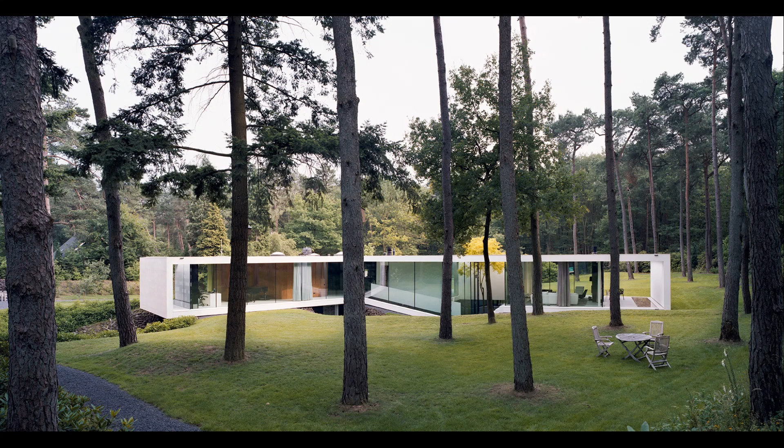So we came up with the idea to call the company Powerhouse Fortune Company. But that was a bit ridiculous because we were broke, so we left out the fortune and called it Powerhouse Company. Now, Powerhouse means a very ambitious and hard-working team, to be a powerhouse. And company stands for the idea to collaborate, to work together, not only with architects in the office, but also with your clients and different partners. And that's how we set off. And we were very lucky that we got a fantastic first commission for a villa, and for me it was a fantastic time.

I was able to use all my knowledge from the Fachhochschule in crafting and drafting this first project, and we won a lot of prizes with it. And it was for me a fantastic way to return to architecture as an active deed of doing after, let's say, 4 years of mainly thinking and writing and doing very large schemes.

So in the beginning of the office in 2005, the economic momentum was quite good, and after our first villa, we got another villa as a client. So we were going quite well until, of course, in 2008, the entire economy collapsed. And what was for us quite shocking as architects was that we discovered that after the bankers, the architects were also fired. So the two biggest groups of people that were being fired were the bankers and the architects.

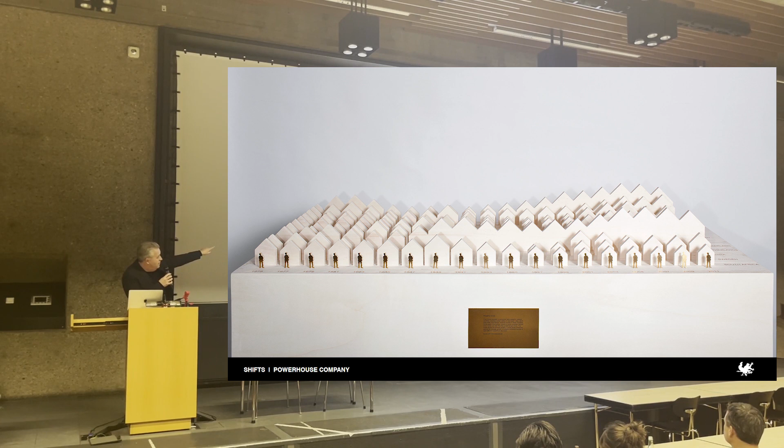Basically, that is the rising average wage in Europe, and you can see that it's not really rising, it's extremely stable. And in the back you see the housing prices going up and down. And you can see in some countries that the housing prices are going up a lot faster than the wages. And this simply means that in some cases, as was also in the last few years, houses were making more money than the people living in it. So people could go to work, but the houses stayed at home, and they made more money in a year than you did as a worker.

So these mechanisms were for me extremely interesting to uncover, this kind of relationship between finance and architecture, and also you could say the almost paradoxical relationship. And at the same time in the office we really try to keep on working and try to basically build as much as we can.

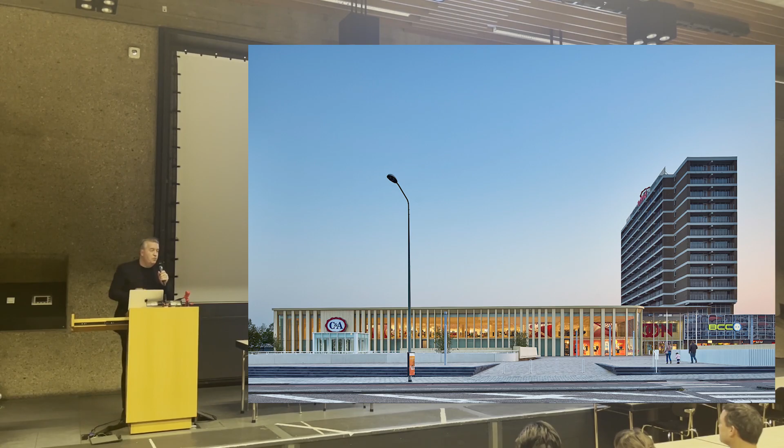So one of the projects we did at that period was, for instance, this extension of a shopping mall from the 60s, which was a job that we were very eager to do, because I was also eager to explore commercial architecture. But as we did this design, it was for me very fascinating that we were only allowed to design the facade, and we were not even allowed to communicate with the contractor about the way it was being built. So it was actually, you could say, an extremely uncoupled experience as an architect. It was definitely not as integrated as the villas we were doing.

Talking about villas, in that same period we got another commission for a villa in Munich, and that was built over the course of 3 years. And this villa was, you could say, a total Gesamtkunstwerk, where we were able to detail almost everything in the building. On the front facade, the building is entirely made of marble, as you can see. But these louvers, as you can see, can also open and close automatically.

The doors were, of course, entirely custom made. Here you can see all the sliding panels and all the windows, meticulously detailed. And of course here you can see that our love for detailing and engineering is extremely present.

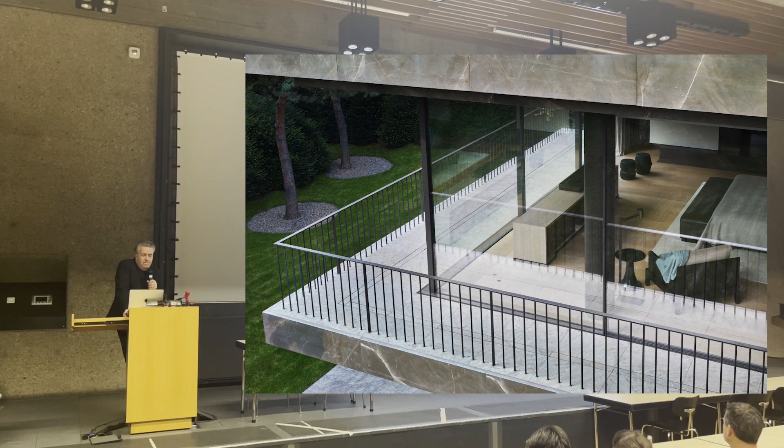But these kind of projects are the projects where as an architect you can fully manifest all your, let's say, design desires without being interfered by the kind of cruel logic of the marketplace. So, as beautiful and as nice as it is to build these buildings, of course, for me it's also very much kind of a niche within architecture that I very much enjoy doing and building.

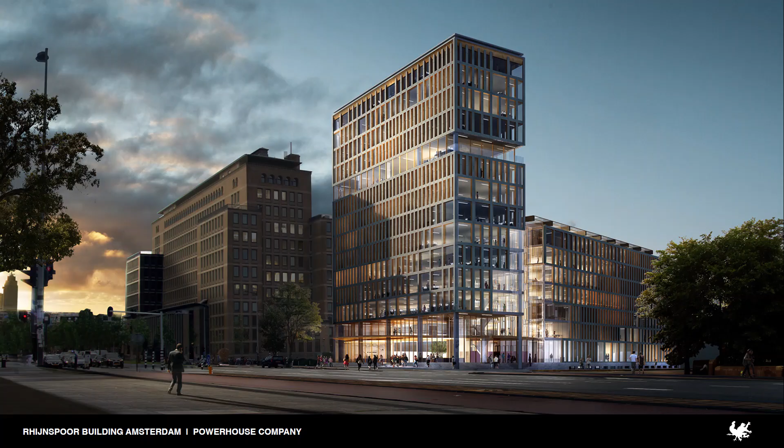But at the same time, I also believe that architects are generalists and should generally be able to build any type of building. So even though it was for us, let's say, relatively easy to keep on working only in the villa department, we were always really pushing to do other types of buildings. Now one of the next buildings we did, which was for us a very big step, is when we won the competition for the Fachhochschule in Amsterdam.

Actually, it was the school where I went to school myself. It was a competition that we won to design the new building. And I was extremely excited because I thought, well, this is the first public commission. And I thought, well, now that we win it, we will probably immediately have a meeting with the director of the school, with the dean, to talk about his ideas about education, to see how we can use architecture to improve technical education. But the irony of that building was that, I can talk shortly about it.

The plot is right here, it's right in front of these two buildings. The building on the left is a building that everybody loves in Amsterdam, and the building on the right is a building that everybody hates in Amsterdam. And the funny thing is that the building on the right is an extension by the architect that used to work for the architect of the building on the left. So there's, people say, a little Oedipus thing going on there.

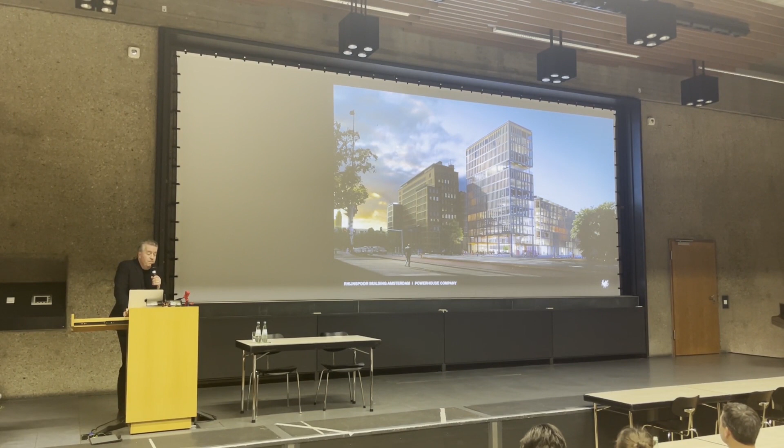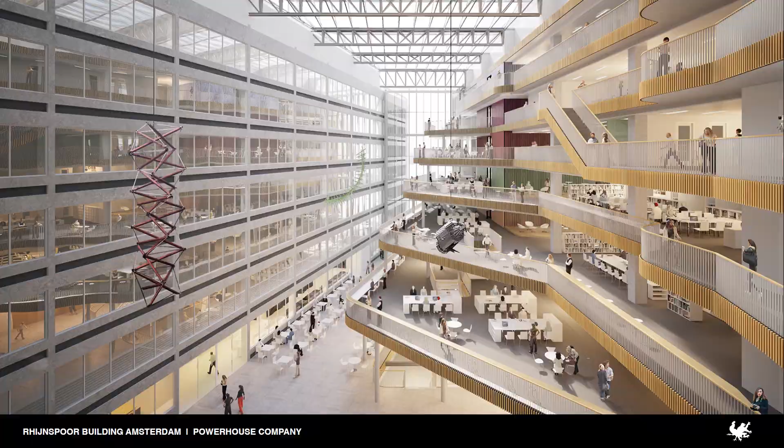And what we basically did is that we built this building in front of it, and by building in front of it, we were also able to create a new atrium inside, which was able to use the facade of the building that everybody hates as a new interior facade. But for me, the interesting thing about this project is not so much about the architecture, but what I want to speak about is the fact that it took almost 3 years for us to speak to the director of the school.

Because the first meetings we had were with the facility manager and with the financial manager of the school. And all the meetings we had in all the technical phases were only about the real estate logic of the school. So it was all about square meters per student, the size of the classrooms, the amount of money being spent on these students. And for me, it really led to a larger research where I started to see what is this public client actually about? Do we still have public clients in the Netherlands?

And it led to this kind of moment where I really started to think about this kind of reality that is surrounding us, which is, you could say, the hardcore neoliberal reality, which is also the case in Europe in general, where culture and architecture is more and more swallowed by the commercial domain and not so much anymore part of the welfare state. For me it was clear that the role of the architect is diminishing in this kind of neoliberal world, this increasingly capitalist world we're living in, whether we like it or not.

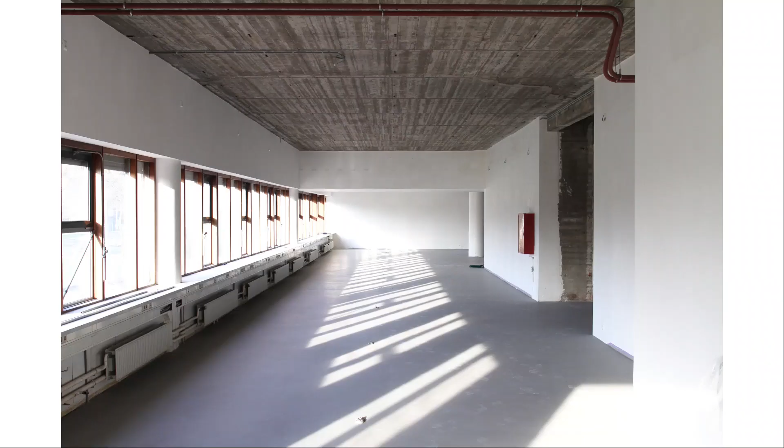So what I tried to do is find a way to buy that building and then transform it into apartments. What I managed to do is ask the government whether I could buy it from them, but I would only pay once I changed the zoning law. And they gave me 2 years to do that, and in those 2 years I was able to change the zoning law and sell the apartments. And with that money I was able to renovate the building and of course change the plan entirely into a living and housing plan.

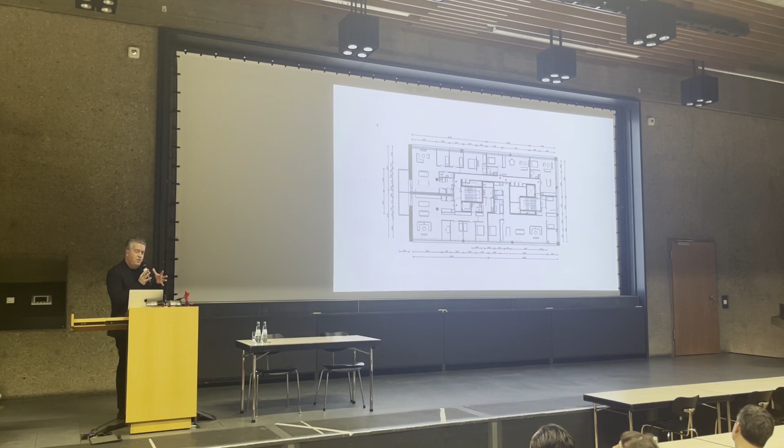And what we did, for instance, was to mix smaller apartments with larger apartments. Interestingly, the real estate broker said you shouldn't really mix smaller and bigger apartments, because then you have people with less money mixed with people with more money, and it will create problems. But I said, I think it's actually nice to mix them. I think it makes sense. And he also said the bigger apartments, you probably won't sell them. The funny thing was the bigger apartments we sold immediately, the smaller ones as well, actually. And we managed to sell all the apartments and transform this old office building into a new residential building.

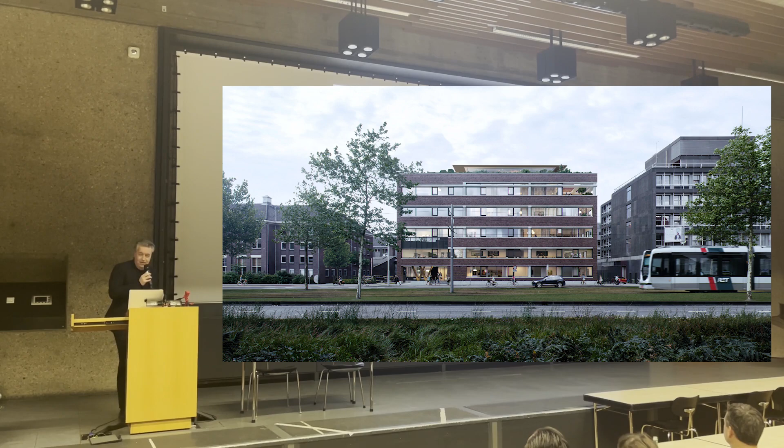And then on top of it, as you can see, I built a house for myself, because that was of course also one of the secret agendas, to build a fantastic penthouse on top of the roof. So that's my house on top of the roof. And this was my first experience with project development, which I really liked a lot, because all of a sudden I was doing a commercial project, but I was also in charge of it. So I was able to really think about the qualities of mixing smaller and larger apartments. I was able to think about where I want to invest, what qualities I want to create.

At the same time, I was also director of the Berlage in Delft, which is a postgraduate school, and also a school I went to myself, so it was very nice to come back and be the director of the school. But since the Berlage is also an accredited institute, after 3 years it became clear to me that working in an academic environment is really quite frustrating, because it's extremely pre-programmed according to the accreditation committees. Well, I guess a lot of the professors here will probably acknowledge that. It's always quite a struggle to find your way with these quite hardcore accreditation committees.

So after 3 years, I was doubting whether to renew my term. And since I had just done this first development project, I thought, you know what? Maybe I shouldn't extend my term for another 3 years, but maybe I should just become a project developer and start a new company. That honestly felt a bit like making a large jump, because of course developers are generally seen as kind of born evil.

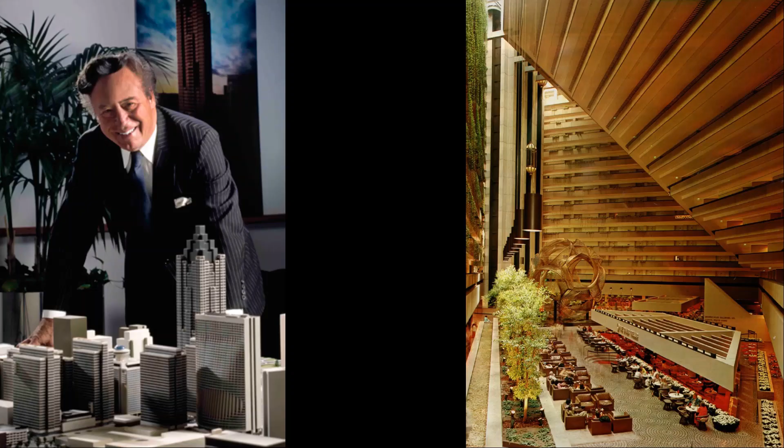Of course, there's few examples of architects that also develop. This is one of my favorites. If you don't know him, you should really look him up. His name is John Portman. He's from America. He was a developer from the 70s onwards, an architect turned developer, and he developed really huge hotels, fantastic shopping malls, and he was quite inventive.

For instance, the hotel on the right, which is the Hyatt Regency in San Francisco, had this massively huge atrium, which became extremely popular. At that time, all the developers thought he was doing something extremely stupid because he was building this huge atrium. And they said, what's the use of this huge atrium? But of course, as a space, it's fantastic, and it still is a fantastic space. It's a kind of ruthless building. And it became a wildly popular model for hotels in the 70s.

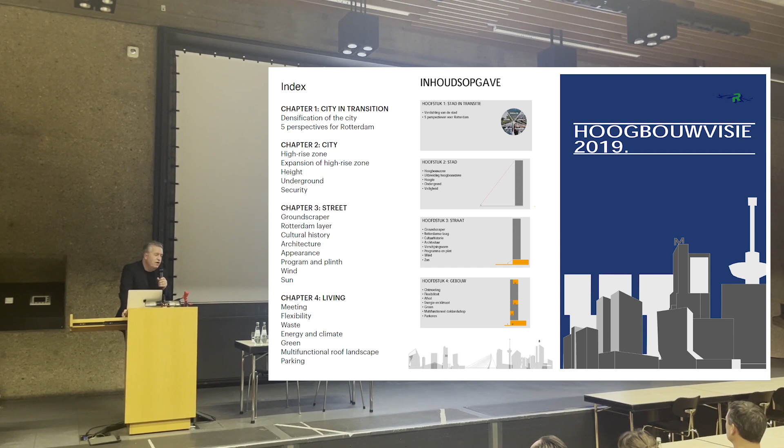So Rotterdam redefined itself as a modern city, and it's also redefined itself as a high-rise city. Now, Rotterdam was the first city in the Netherlands to create a kind of high-rise policy. And I think that's quite interesting to speak about, like how did they do that? And what is interesting is that Rotterdam really defined areas where densification by high-rise is allowed. And they defined all these areas where you can build towers.

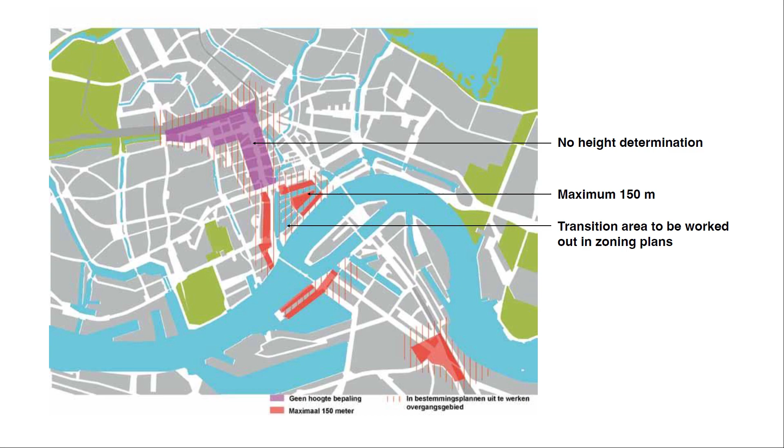These are basically along the main streets and main roads of Rotterdam, and also in the areas where in the 60s they built mainly shopping and offices and actually quite little housing. Interestingly, the city center of Rotterdam has quite a limited amount of housing because of the modernist planning—there were a lot of offices planned.

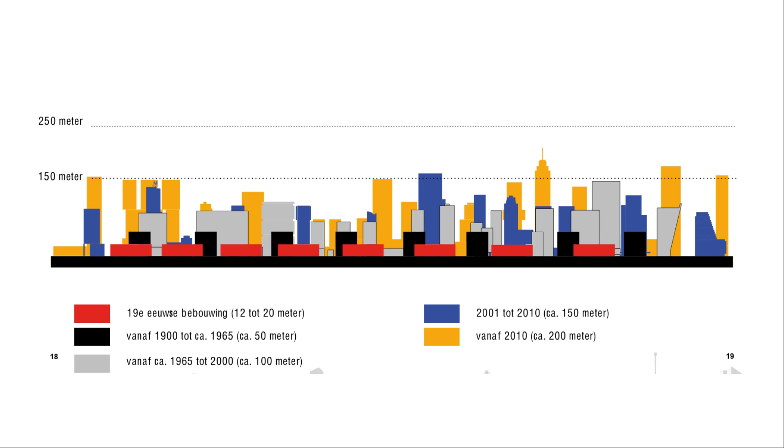This whole policy is updated quite regularly, and it describes all the different facets of the Rotterdam urban structure. So basically you have the 19th century housing, maximum 20 meters high, which is the red part. Then it has the up-to-50-meter-high part until the 60s, and then it goes up from there into the early 80s and 90s until the 2000s now. It's really trying to create this mixed skyline of all these different sorts of architectures in Rotterdam.

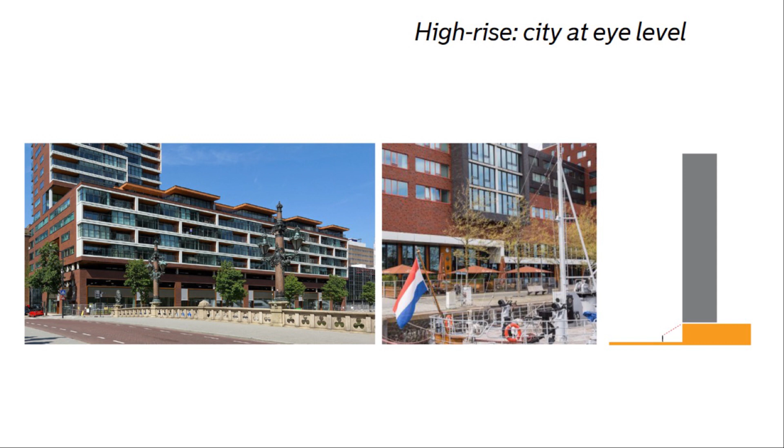But what it's now focusing on a lot is how the city looks at eye level. The policy now says that if you want to build a tower, you can only do that if you really create a livable city at eye level. That means all the technical spaces need to be underground, all the parking needs to be underground. On the ground level they want shopping activities or people living there so there's really a contact with the street. That's actually a very important rule.

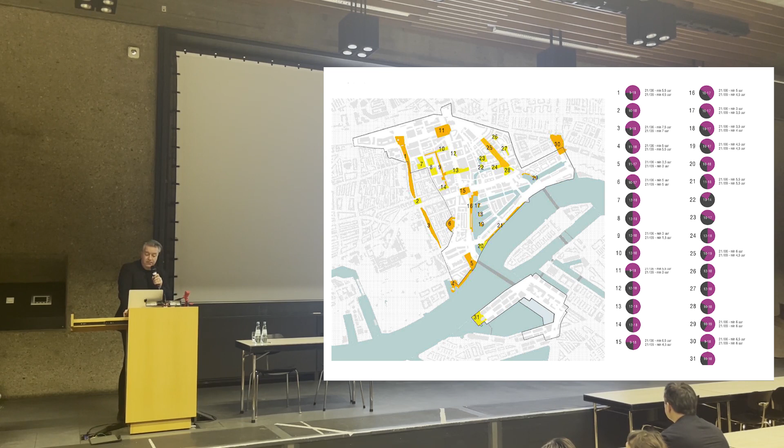Another thing they did is define public areas in the city where they want to keep a certain amount of sun and where you cannot add more shadow. It's a very interesting principle—they're called sunspots, and all these areas are the main public spaces. Whatever tower you design or add is not allowed to add more shadow than a certain amount, which you can see on the right.

Then, of course, there's the whole idea about wind as well. The way wind behaves around towers is also researched a lot in Rotterdam, and it's used to define an idea of setbacks—the towers always step back a certain amount to actually block the wind from creating huge wind tunnels.

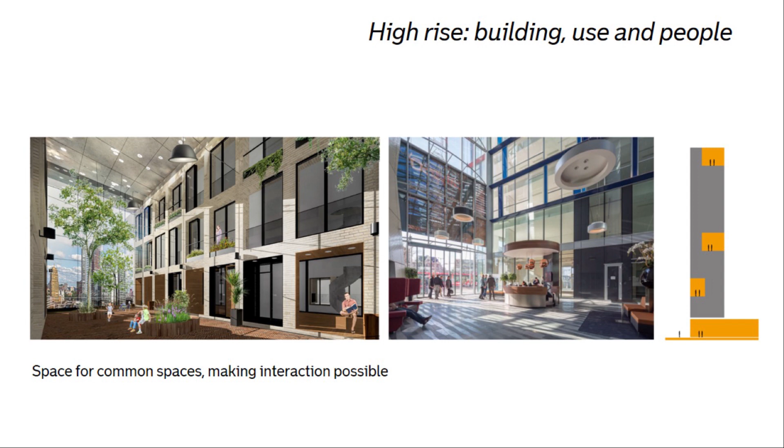And of course, what they're doing recently is adding this idea of social interaction in the towers—you're not allowed to go from the parking garage straight to your apartment. You always have to go through the lobby, and if the tower becomes really high, you have to add another lobby so people actually have space to meet and interact. The idea of anonymous living is countered with that.

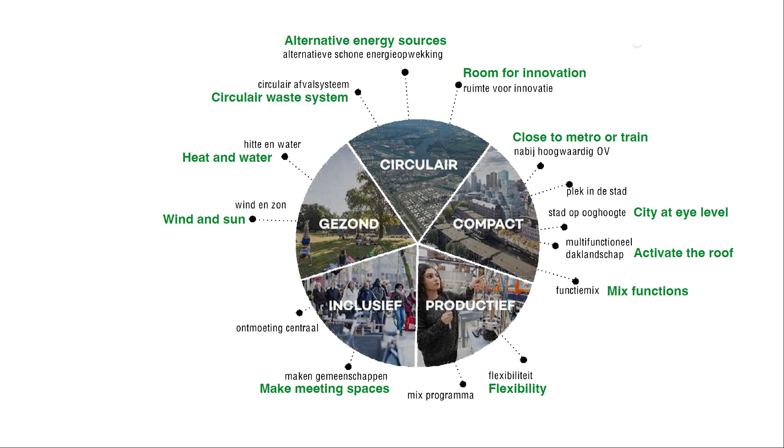So basically, the Rotterdam high-rise policy has really evolved a lot, and it became a really comprehensive idea on how to create sustainable towers. We're also looking at all the different qualities you should consider when designing a tower, whether it's alternative energy sources, proximity to public transport, inclusivity, or health. All these elements are now part of the high-rise policy.

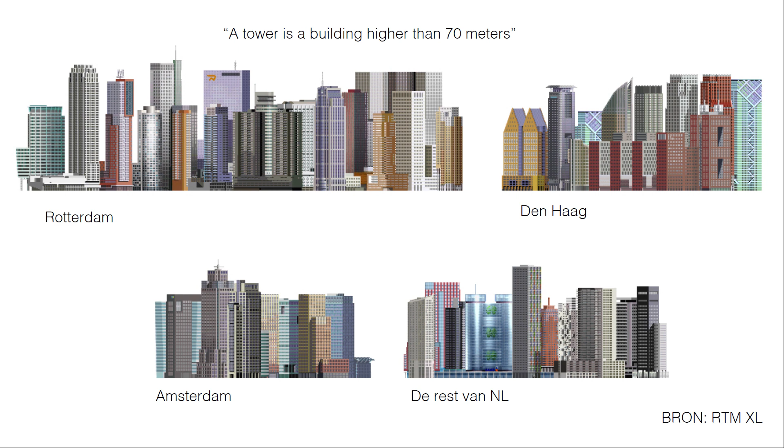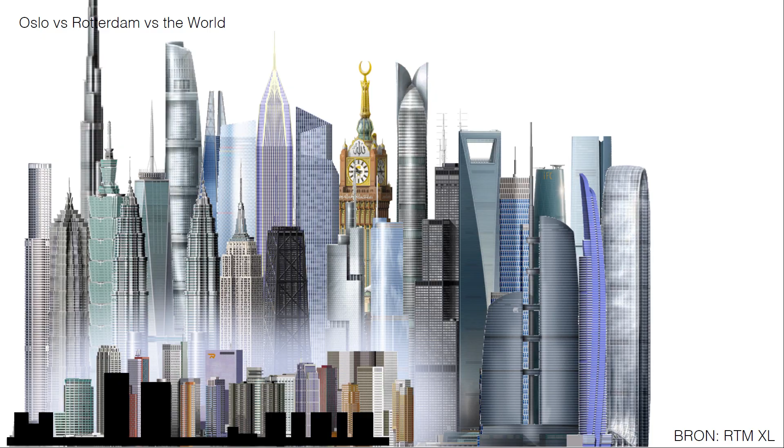Now, when we talk about high-rise, I want to show this quickly—these are the high-rises of Rotterdam, and in Holland we consider every building higher than 70 meters a high-rise. Now this is Rotterdam, and this is Rotterdam and Oslo—you can see that Rotterdam is not that high. And this is Rotterdam, Oslo, and the world, and you can see that Rotterdam is actually extremely low. So even though in Rotterdam we speak about high-rises, it's still extremely gentle, you could say.

It's actually right in the center of Rotterdam, and in that area we're allowed to build 150 meters high. But since the site was quite small and narrow, we designed this quite slender tower there, 22 by 22 meters.

Creating a very compact tower, and at the bottom making setbacks to create a very lively plinth. And then as a main quality, creating these fantastically large windows to really create amazing views over the city.

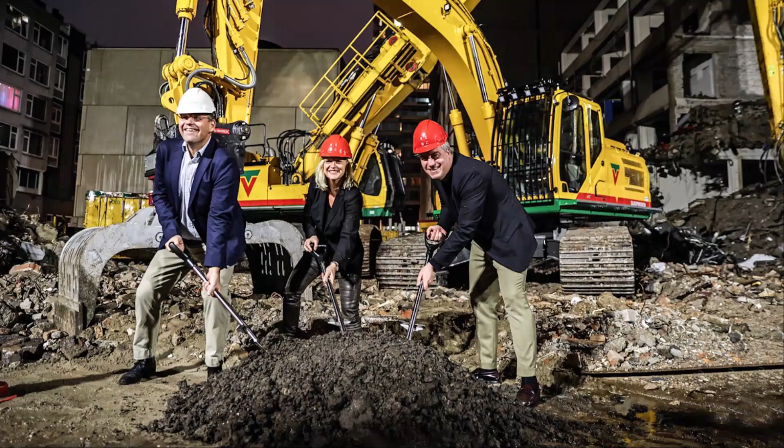Over the last 8 years we worked on getting all the permits for this, and actually 2 weeks ago we finally started construction of that project, as you can see. I'm super happy that we finally managed to start building this tower, which we designed and also developed.

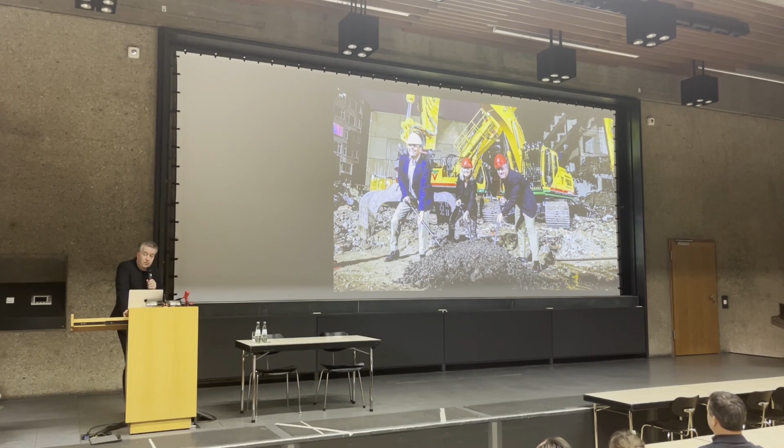It was actually our first introduction to high-rises and how to integrate them into the urban fabric. A few years later, in 2018, we started working on the Rijnhaven master plan and on the Koninklijke terrain. The Rijnhaven, just to give you an introduction, is actually this harbor.

It's the Rhine harbor. What you can see right in front of you is that the Rijnhaven was made in 1910, and when it was finished, it was actually the most modern harbor in the world. It was the first electrical harbor, and it had the largest warehouse in the world at that time. It was also the part of Rotterdam from which all the boats to America would leave, which meant that people like Thomas Mann, but also Albert Einstein, left from the Rijnhaven to America.

And there's still a hotel there called Hotel New York, a beautiful Art Deco hotel built in that time, which was the point of departure. So millions of people here from the Rijnhaven departed to America.

But what I think is interesting to realize is that when you look at the center of Rotterdam, you can see all these harbors here. These are all the historical harbors, so this is basically the origin of Rotterdam as a harbor city. When it was completed, the Rijnhaven was actually the largest harbor in a new harbor basin in Rotterdam.

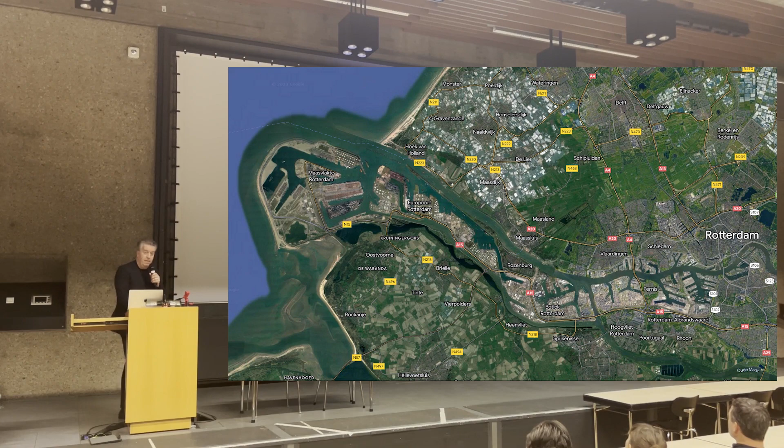And then when you zoom out, you actually see the latest harbor we added, which is the Maasvlakte, which in itself is bigger than the entire city center of Rotterdam. It just shows you the massive scale increase that the harbor of Rotterdam has gone through over the last 100 years, because the Rijnhaven is 110 years old.

So the Rijnhaven, of course, is pretty much useless today as a harbor. It has been for 30 years already, as is also the Maashaven right next door. These harbors are still in use, and of course, all the way in the back here is the Maasvlakte.

In the 90s already, the city of Rotterdam set out to redevelop this harbor by building this Erasmus Bridge, designed by Ben van Berkel, and it became a really famous icon of Rotterdam. Then in the last 25 years, all these high-rises were built on this piece of land. This was still very much a bad area, and when they built this little bridge here, this whole part was amazingly activated and now became an extremely nice area to live.

Ever since, the Rotterdam municipality has been thinking about a master plan for this entire Rijnhaven, and we were closely engaged with that because as a developer we were engaged with this plot of land called the Koninklijke factory, which is the last factory still active in the Rijnhaven area. It's actually a food production factory, and because that factory is still active, it is impossible to create a loop around the harbor, because this factory is still blocking the public use of this space.

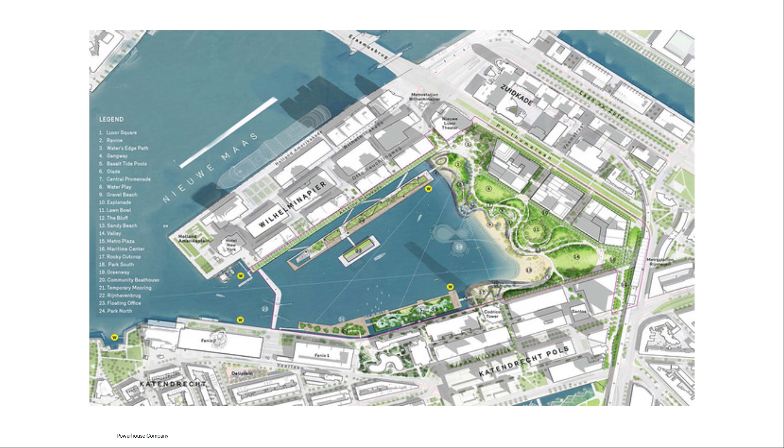So the master plan that we designed over the last few years, together with the municipality, is very much an integrated effort in learning all the lessons from the Wilhelmina Pier, which was done in the 90s, which is basically a checkerboard of very large towers that are all quite separate from each other and also really have their own identity.

Basically, they're all ego-driven towers by the architects, because there's Foster there, there's Koolhaas here, there's Alvaro Siza here, there's Mecanoo there, and MVRDV running one there. So basically this is one particular way, you could say very much a 90s way of planning that part.

The municipality said if we're going to redevelop this harbor, then we really need to make it a lot more nature-based, because at the moment it totally lacks green, it lacks parks, and it lacks space to stay outside and enjoy urban life.

So what the municipality decided was to basically fill this part of the Rijnhaven again with land. By filling this part with land, they were able to create a huge park and create spaces for more housing.

And on our side of the project, we were thinking about the redevelopment of the factory area right here. By redeveloping it into housing, offices and hotels, we were able to create this urban loop around the Rijnhaven.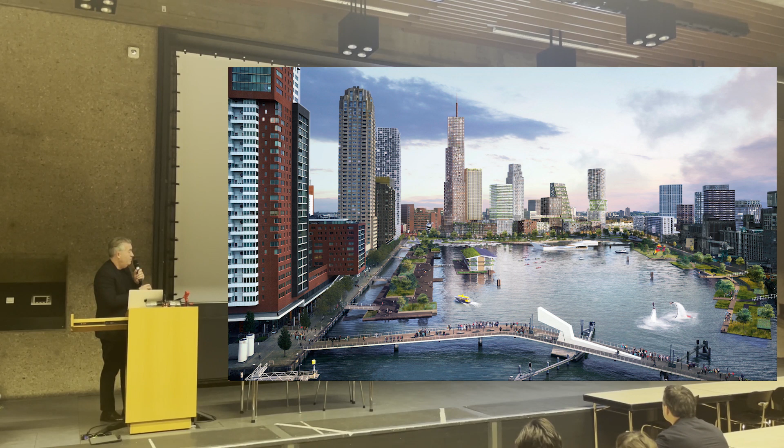So this is what the municipality and Powerhouse together designed. The idea is to create this park here with densification of office towers and housing towers. This is all housing, and then around it also floating parks, because the Rijnhaven is a tidal river.

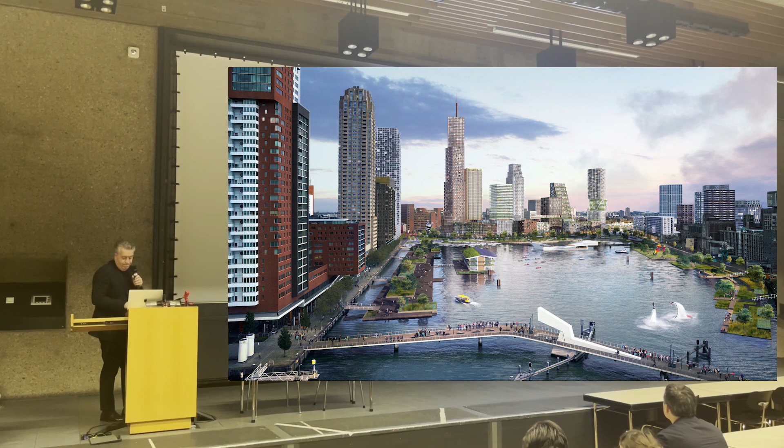It's going up and down 2 meters every day, and we create here these floating parks. And of course on this side we are very busy with the redevelopment of the Codrico factory. I'll speak more about the floating office later.

So we were able to also reuse parts of it. What you can see about the factory is that it was built in the 50s, right after the war, as a kind of cooperative

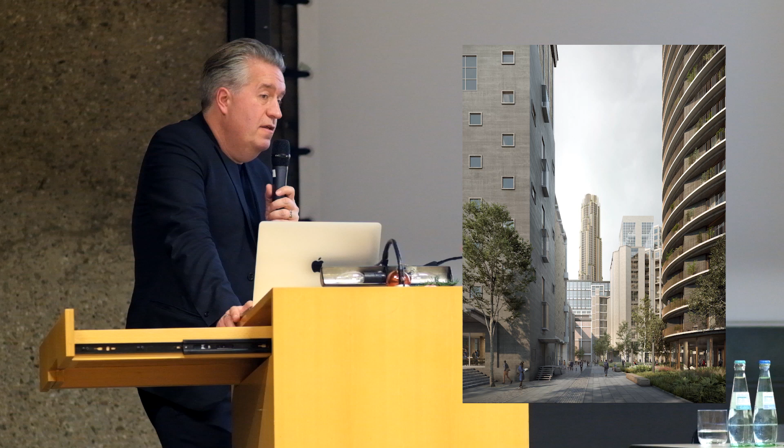And it's really a kind of search for the right way to introduce architecture into this project, because when you work with monuments, it's always a question: do you really want to confront it with a totally different language, or do you want to design, let's say, in harmony with the language of the monument? So these are the designs that we are making, and it's really turning, I think, into a very interesting unity of objects. And also I think it will be very interesting that finally this factory space, which is now a totally private area where you can never walk, will become a totally accessible area.

So this is basically the future view of the project, how it will look in, I think, about 10 years. And it will really become one of the new city centers in Rotterdam, which is interesting because Rotterdam is a city that, because of the center being destroyed, doesn't really have a heart. It has different areas of intensity, you could say, and the Rijnhaven is one of them. Now, within the Rijnhaven, we also designed the floating office.

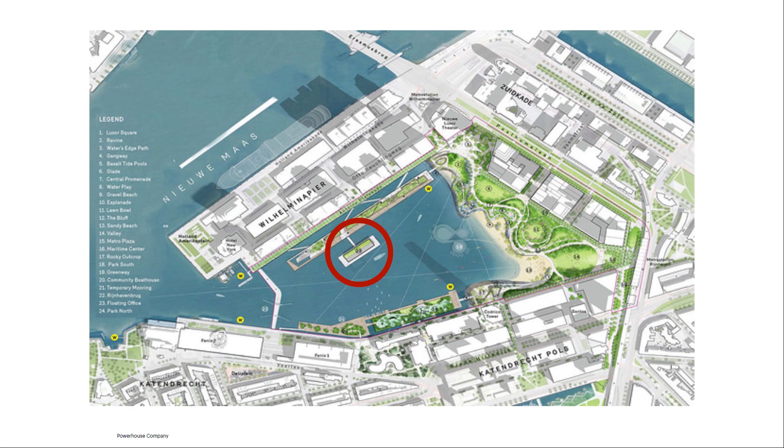The floating office was actually a very strange commission, because it was initiated by Ban Ki-moon from the United Nations, who founded the Global Center on Adaptation, which is basically the idea that because we are living in a time of climate change, we also need to spend research and time and money on how to adapt to climate change. Of course, we need to stop climate change, but we also need to adapt to it. At least that was the idea from Ban Ki-moon.

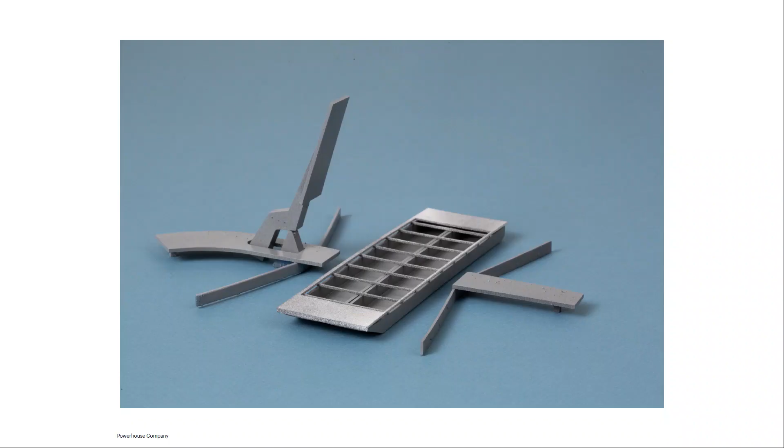And the Dutch prime minister then said, okay, we will house the headquarters of the GCA in Holland. And then the mayor of Rotterdam said, we will house it in Rotterdam, and we will make a floating office. Of course, they had no idea how to do that, so since we were working on the factory, they asked us whether we could come up with an idea. And it also had to be done very fast. We had to build this within 1.5 years. So it's again a very good example of no words but deeds. It was very simple. Mr. Ban Ki-moon, you're going to have a floating office, and it will be done in 1.5 years. And we started thinking, how do we do that?

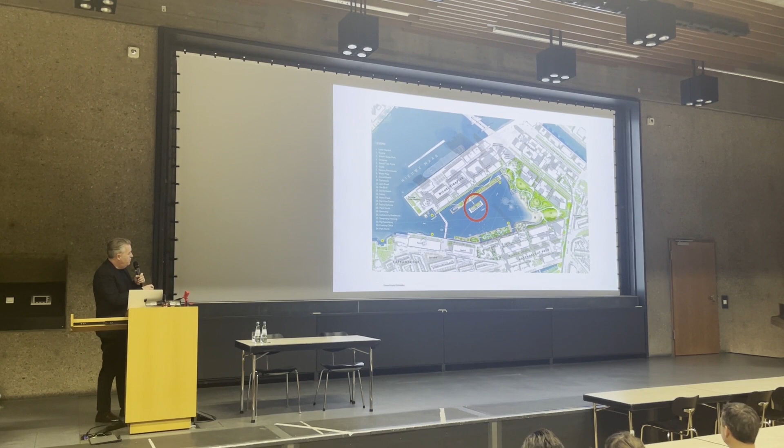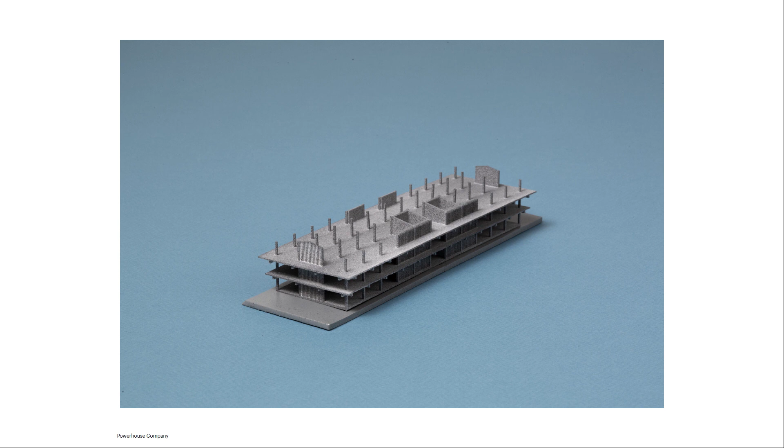Now the problem with the steel barges is that you need to maintain them, and you need to basically take them out of the water every 7 years to entirely repaint all the steel.

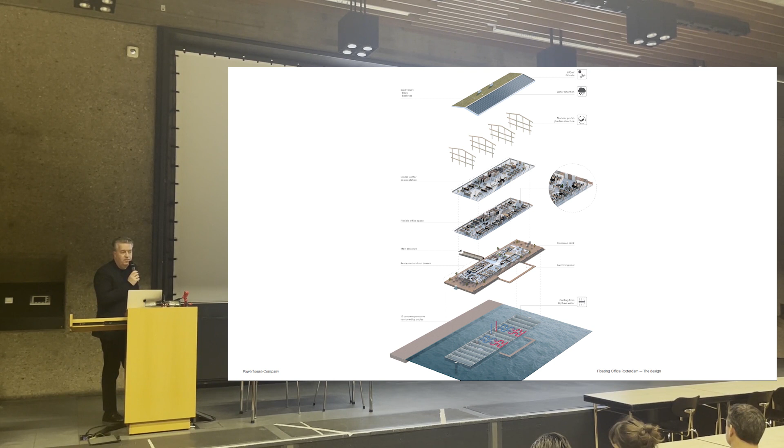So what we did is that we actually came up with the idea to use concrete floating barges. Basically, you could say large floating concrete boxes. And because the concrete can stay in the water for at least 50 years and it will be totally fine, you don't need to clean it.

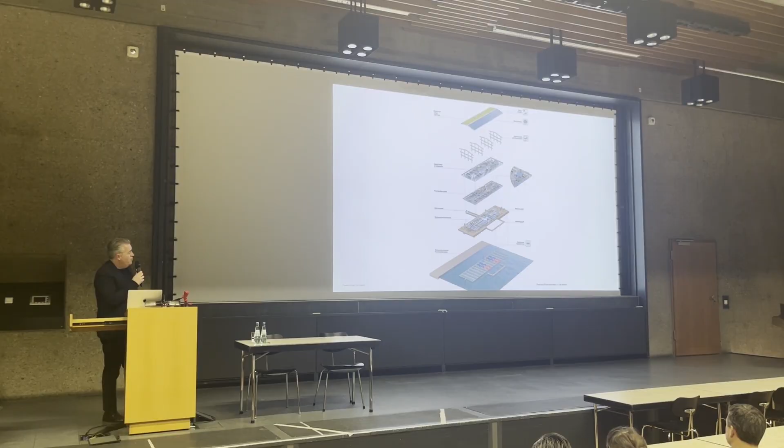But the other beautiful thing about concrete is that it's extremely good in harnessing temperature. So we could use the concrete as a large heat exchanger, basically like a super large cooling device in the water, which should always have the temperature of the water. So this is basically the design we made.

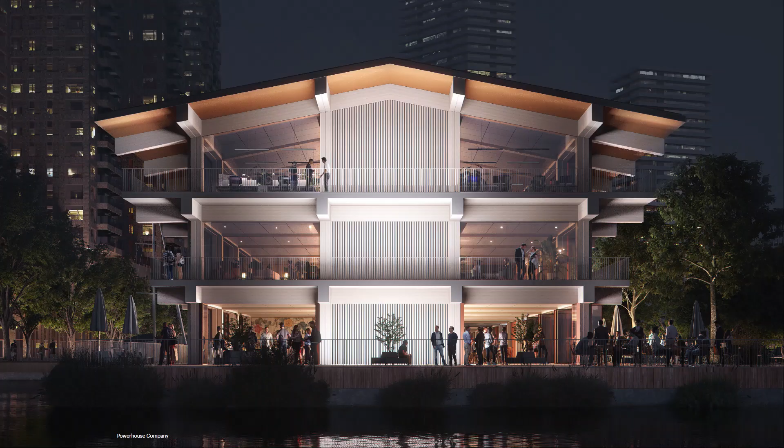As I said, it's a very simple design, but it's really about maximizing efficiency, but also generating extremely generous qualities of the interior. So the beauty of the 6 by 6 meter grid is that you can create large windows of 6 meters wide and 3 meters high in one piece of glass. And all the sheets of glass can be the same, so it's all repetition.

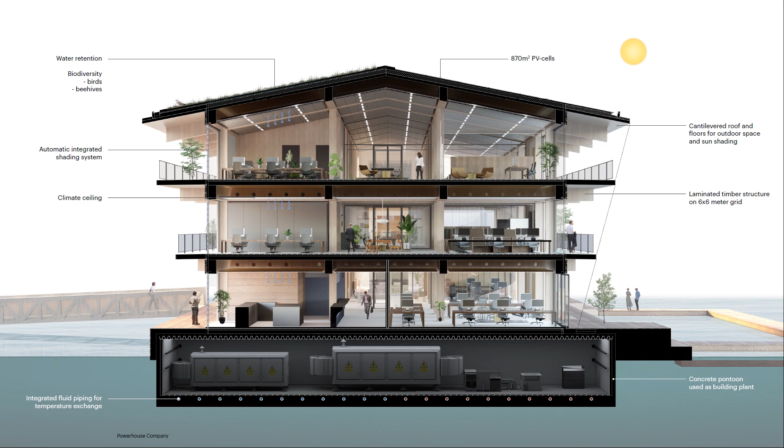And then we can use the pitched roof. That's why it has this shape, because the long side is fully on the south. And we can use it to create 870 square meters of solar panels, which in its totality can generate 140% of the energy that we need for the building. So basically, that's how we engineered it.

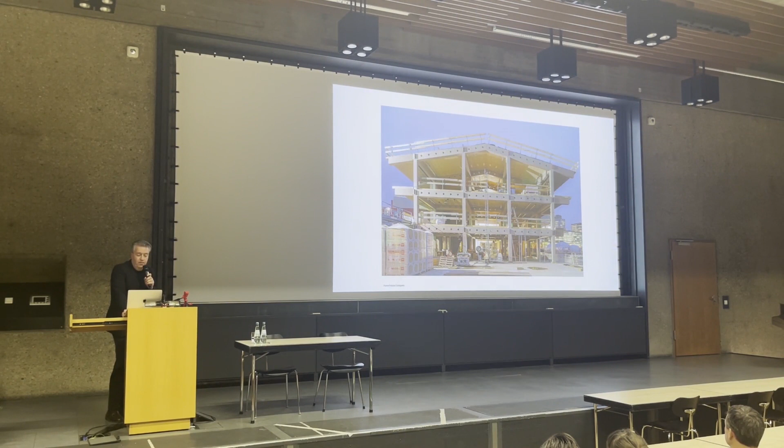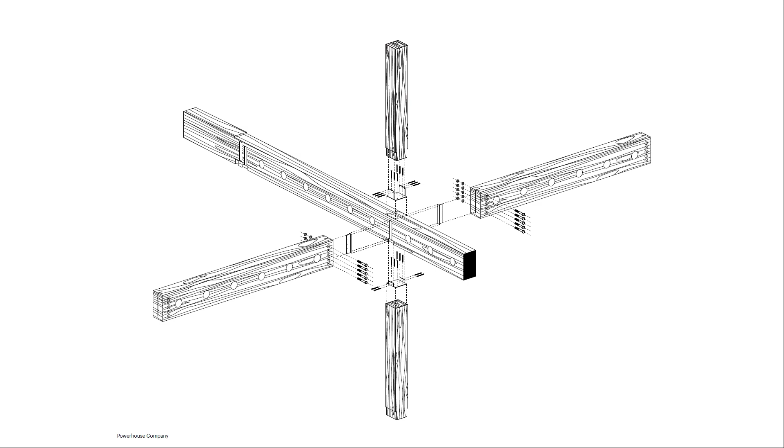Within 3 months, we started building, and we built it in around 12 months. And this was also the first building where we were not using a main contractor. So as a real estate company, we were also the contractor of the building. We were designing it, developing it, we were also building it, and we were financing it, and we also remained the owner of the building.

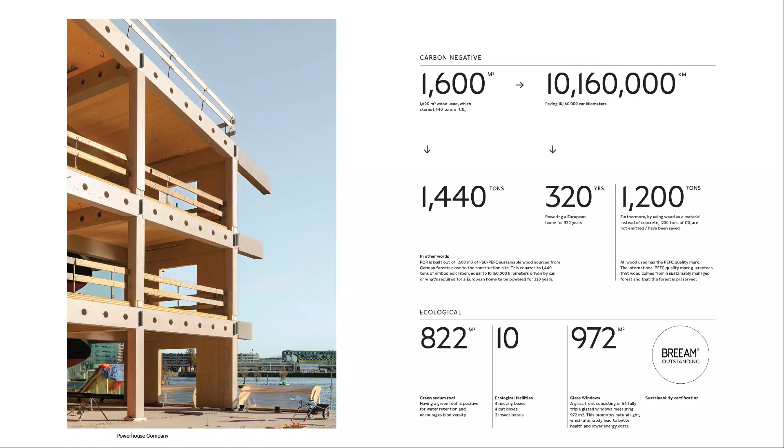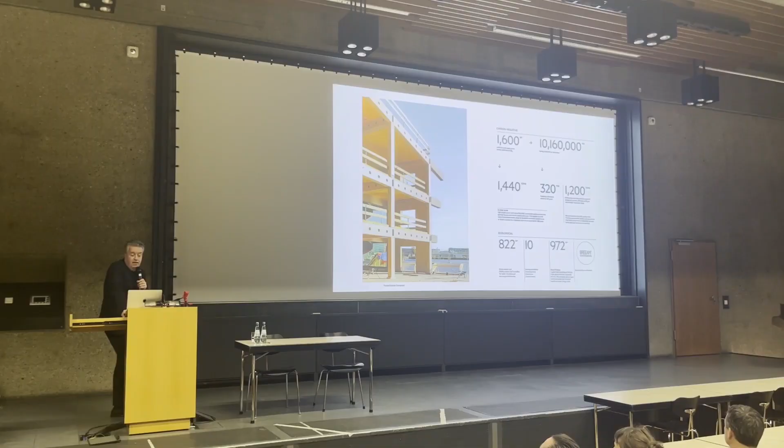Here you can see all the details we made, and basically the idea of the prefabrication: to create a large prefabricated construction set that you just simply need to assemble on site. And the interesting thing is that because we use wood, the building is actually in itself carbon negative. So there's more carbon stored in the wood than is used to create it, despite the concrete, the steel and the glass. And of course the building, as I said, is also entirely energy positive.

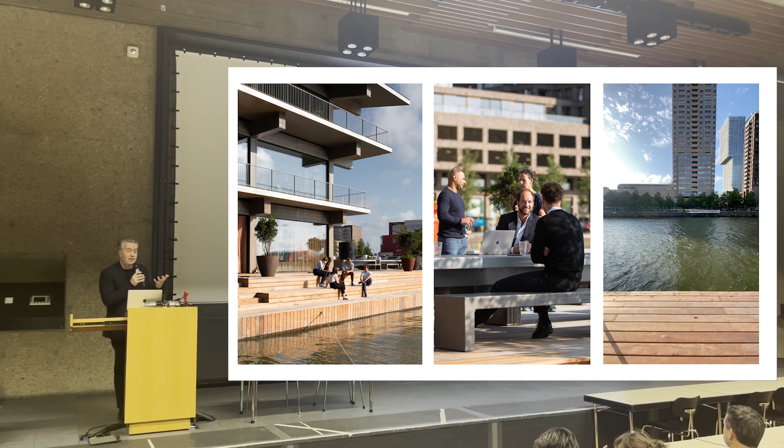For instance, one of the things is that when you build on a floating foundation, you cannot use lasers for measuring because it's always moving, so the lasers don't work. So you have to use the old-fashioned winkelhaak, they call it in Dutch, like the old-fashioned measuring instruments. And also a lot of it was done on site, on eyesight, to really just see if it's straight.

And when the building was finished, we calculated that the solar panels would be slightly heavier than the green roof on the other side, but when it's raining, the green roof actually became heavier, so the building was a bit hanging to the side. So we had to balance the boat with weight, we had to get it straight.

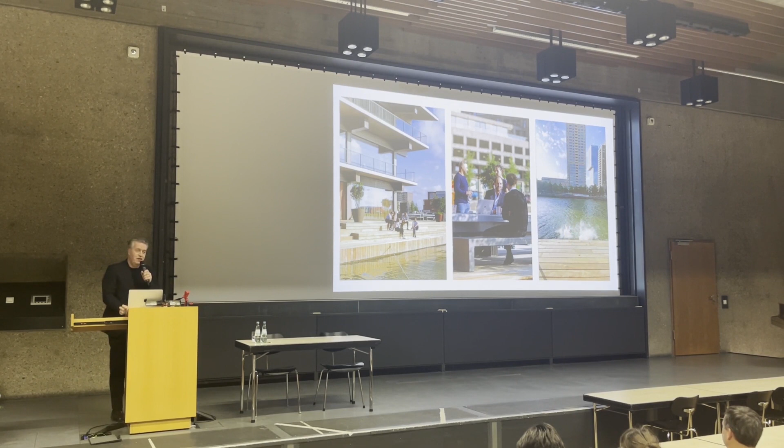But it's a fantastic building, and you can see that you can also jump from the terrace. Yeah. So the balconies are used as a springboard on Friday afternoons. And all the interns that work in our office, there's a tradition that when they leave, they have to jump off. So that's a fantastic tradition.

I very quickly want to show you one last project, which is Rise. Rise is basically our second big project in Rotterdam, and I think it combines a lot of the tactics, but also lessons that we've learned from our other development project we did in Rotterdam. And Rise is basically these 3 towers that you can see over there.

And I love this picture because this tower in the front is called Het Witte Huis, also known as the White House. And when it was finished, in 1898, it was the tallest office building in Europe. It was, I think, something like 50 meters high. And I think for 30 years it was the tallest office building in Europe. I always think that's such a brilliant thing.

So I love that image because you see the kind of old Rotterdam ingenuity, and of course then whatever happened behind it. So Hofplein is basically one of the main entrances to the city. So here you have the city hall, and this is Hofplein. And what you can see is that, of course, here you have the river. Here is actually Codrico and the Rijnhaven, and this is the main shopping area.

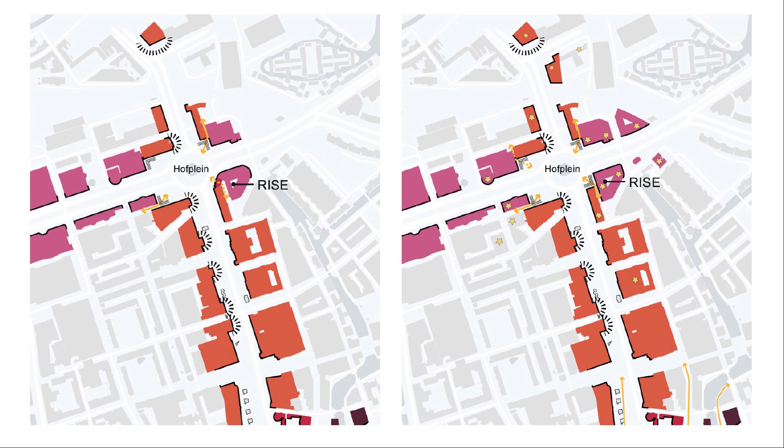And one of the strategies was to basically turn that corner into this corner in order to really, finally finish, let's say, the master plan of the 60s and to bring some kind of balance to this really quite diverse part of Rotterdam in terms of architecture.

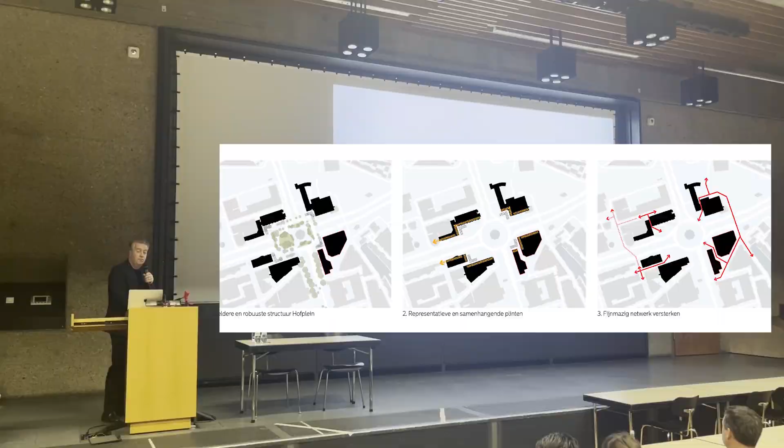So this is basically, you could say, the urban logic to recreate the square and, instead of having this huge roundabout with traffic, to actually reduce the traffic enormously and maneuver all the cars around the square and create a big park in the middle with a fountain in the park, which was, I think, also a very bold move. So basically going from this building into this kind of quite classical setup of slabs and a block behind it, and then blending that into the fabric of Rotterdam.

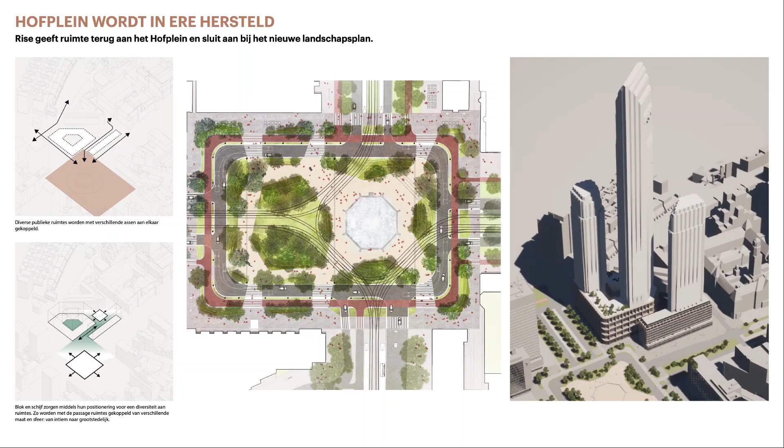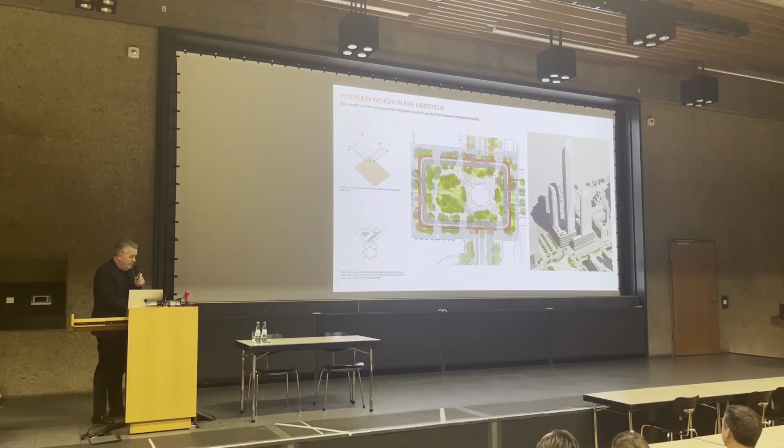And here you can see the new city square, quite similar to the plan in the Rijnhaven, where they add a lot of green. Here also they're adding a lot of green in the middle of the city while reducing the amount of cars. And then in order to really densify that part, we added 3 towers to these blocks, because actually the Hofplein is the area in Rotterdam where you can build up to 300 meters high. And yeah, we thought it would be quite interesting to try to achieve that.

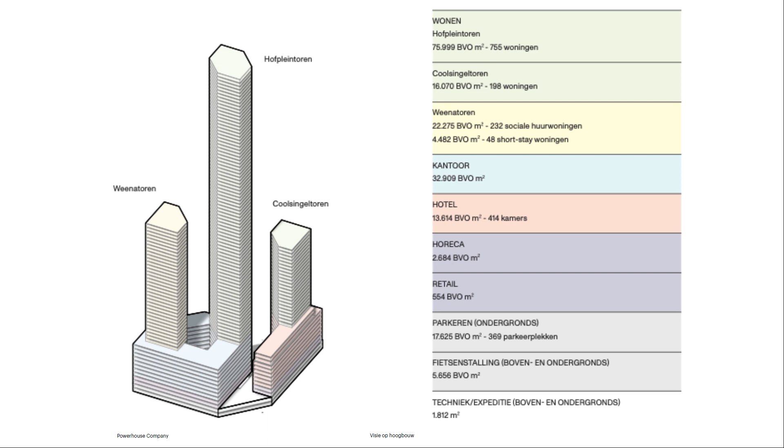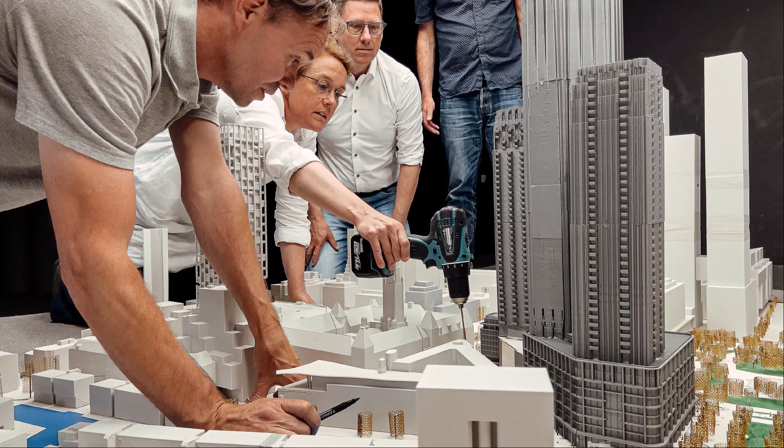So these were, let's say, the first volume studies we did, basically on the programming. And then, of course, we had to do a lot of research on all the different sun studies, because with these towers you add a lot of shade to the city. But we managed within the shapes of the towers to really stay within the amount of shading required. And we spent countless hours in the wind tunnel, researching all the effects of the wind on the urban space and making sure that all the area is actually capable of being, let's say, a very good urban quality.

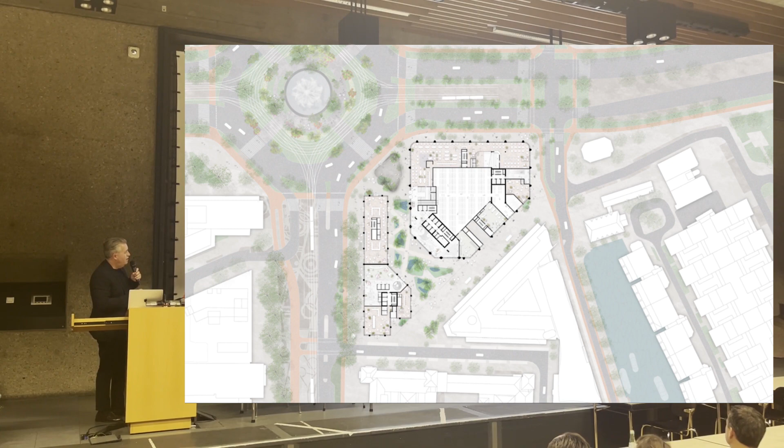So now basically the project is almost ready for application. I think next week it will be addressed in the city. What's also quite interesting is that all the plinths of the building that are now entirely closed will be entirely programmed. So there will be cafes, shops and restaurants, and also there will be a kindergarten, a doctor's station, offices, hotel, housing, social housing, mid-rent income housing. So it really became a total mix of a lot of different functions.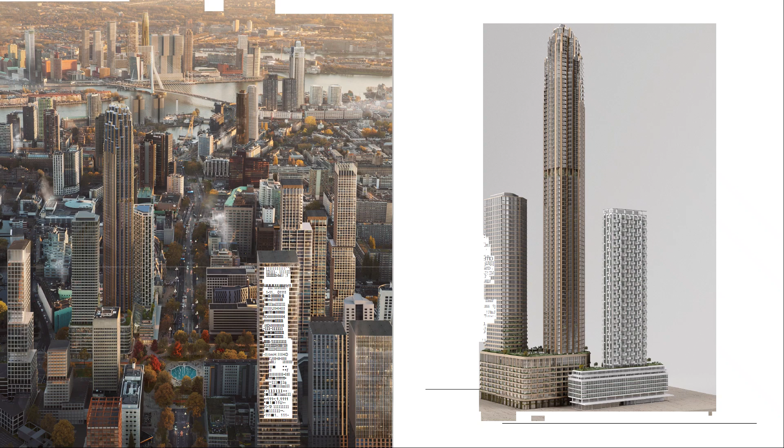And then it will play its role in the skyline, as the city is increasing quite tremendously around that node, because it's right on the metro station and it's, I think, a 5-minute walk from the central station. It will be one of the big markers in Rotterdam. So that's actually the Hofplein.

And you know what I think is interesting, and I want to kind of finish off with that, is that, as I started with, Rotterdam is basically a city that always says geen woorden maar daden, no words but deeds. That's one of the slogans. The other slogan of Rotterdam is sterker door strijd, which means stronger through struggle.

I wanted to end with a little thought: when you think about architects as developers, I think you could definitely see it as a kind of Faustian pact, do you sell your soul to the devil or not? I also think that a lot of people think that it's very schizophrenic to be an architect and a developer, because you're basically Dr. Jekyll and Mr. Hyde. You're basically schizo.